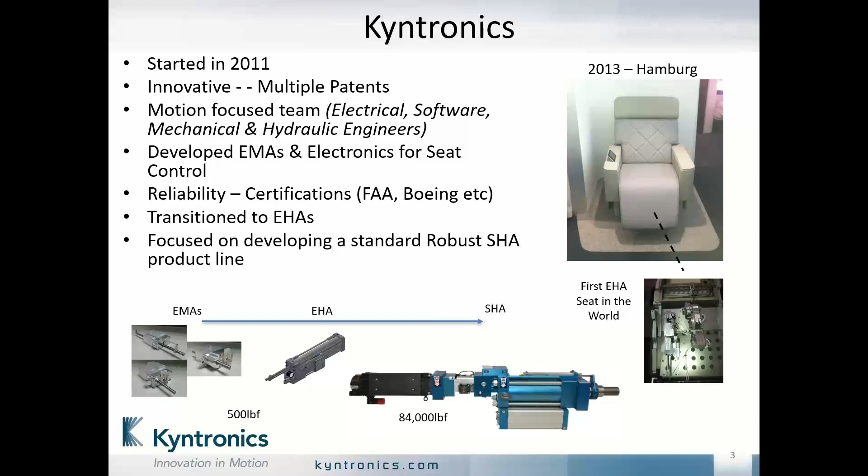So that's the genesis of it. That came from a product that we're not selling today that's going into seats.

During the development process, it was important for us to develop a modular solution. We have over 1 billion combinations. Our focus was to try to maintain standards, minimize our inventory, but have a large breadth of product offering out there—various motors, a couple of different manifolds and pumps, power units. We can provide a panel or enclosure for an all-in-one solution. Our standard is 1-inch to 6-inch cylinder, up to 84,000-pound force.

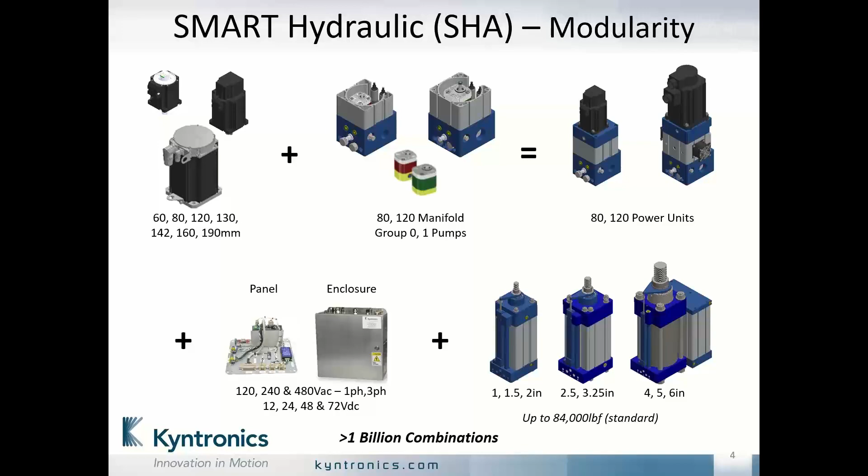So some of the repeated quote themes I wanted to share with you: this product is amazing. Usually we get that after we deliver the product—where's this product been, type thing. It's an amazing product to sell. It's unique, it's different, it's not a me-too product. The all-in-one is also a nice advantage. Those are some repeated themes, and we'll review some of these as we go through the slides.

So the basics of the EHA—this is obviously a repeat for some of you. It's pretty simple: you have a servo motor connected to a positive displacement reversible gear pump. You rotate the servo motor clockwise, for example, which pushes the fluid into the red, pushes the piston up, and extends the actuator, and vice versa counterclockwise. Blue retracts the actuator. The green is your reservoir for compensating for the rod volume. It's the most efficient actuator on the market—there's no metal-to-metal wear, it's an extremely efficient solution, up to 42 tons, and you can synchronize these together as needed if you need increased loads and increased speeds. No hoses, no threads, no leaks.

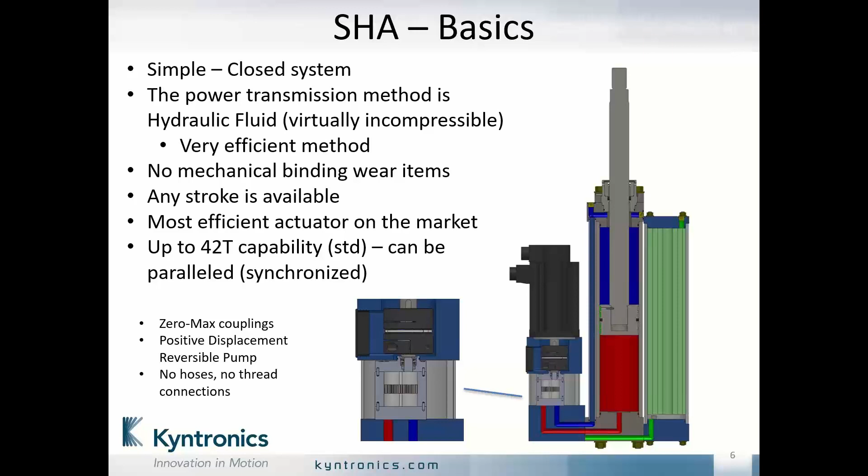The gear pump is surrounded by oil, so there should be no metal wear. Top and bottom, there are films of oil it rests on, oil squeezed together. The shafts have oil on them as a support bearing. So it's a total hydrostatic type sealing—no metal wear on the gear pump, or we have some issues.

Just showing you here is how we increase our speeds. So 0.7 gallons per minute is a small guy, up to 7.8 gallons per minute is a big guy, shown on this particular screen. This is basically your transmission. Of course, the bigger guy takes a bit more power, a bigger motor, but it's a very simple, easy solution to increase speeds. Each one of these can take your 3,000 psi, so your torque's there, and this just increases your flow by making your gears larger.

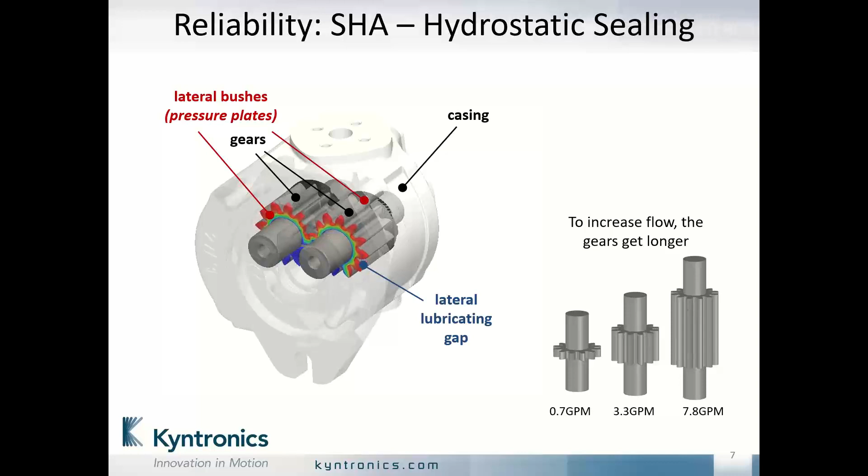Simple circuit. We provide optional cavity plug, check valves, or solenoids depending on your needs, for pressure sensors for force control, both in retract and extend positions.

4-quadrant control, and not much going on here. Relief valves on every single actuator, both extend and retract. This helps protect the actuator as well as the machine. A lot of our competition in this world can only do 2-quadrant control. We're doing 4-quadrant control.

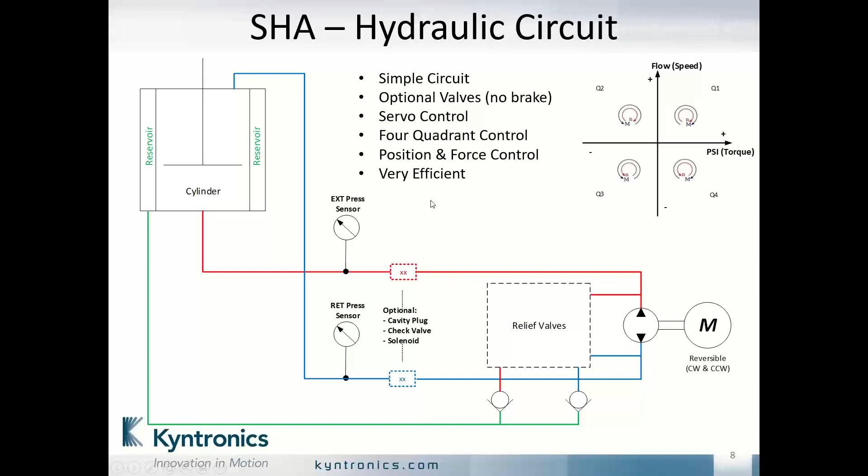The beauty of hydraulics is that it's just fluid. It can be moved in all kinds of different directions. These are some of our standard combinations we've shipped. This helps us integrate into all kinds of different machine orientations. Again, it's just moving fluid, and that's the beauty. We really don't have any issues figuring out a way to get our actuator to fit into a machine without doing any major redesigns.

Down below, just see various configurations. You can attach the enclosure electronics to the actuator if needed. For a DC solution, electronics and motor are all enclosed as an IP68 solution. Of course, we can provide an actuator by itself, customer supplied motor and drive, or something custom.

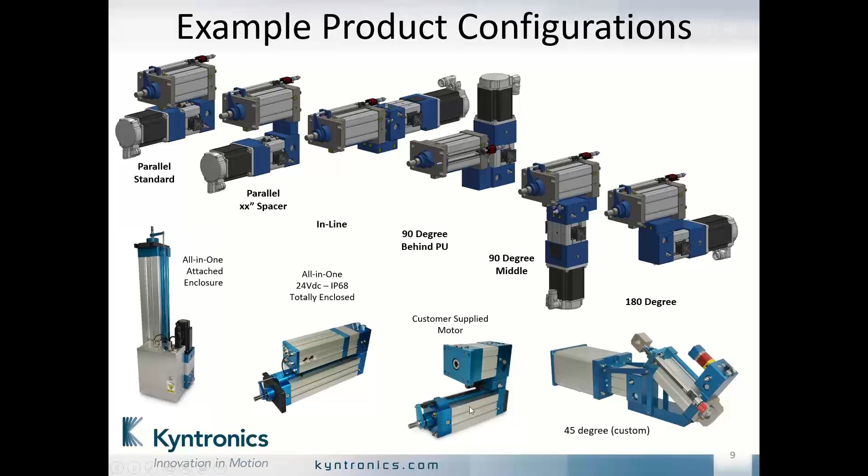Hey, Carl. Yes, I know I told you a moment ago you were coming through loud and clear. We've had a couple of comments that you're sounding a little muffled. If you're able to adjust your microphone position, that might help. We'll do that.

Mounting options, NFPA mounting options, standard mounting options. Nothing too surprising here. Just wanted to show you that all the standard mounting options, NFPA type things are available.

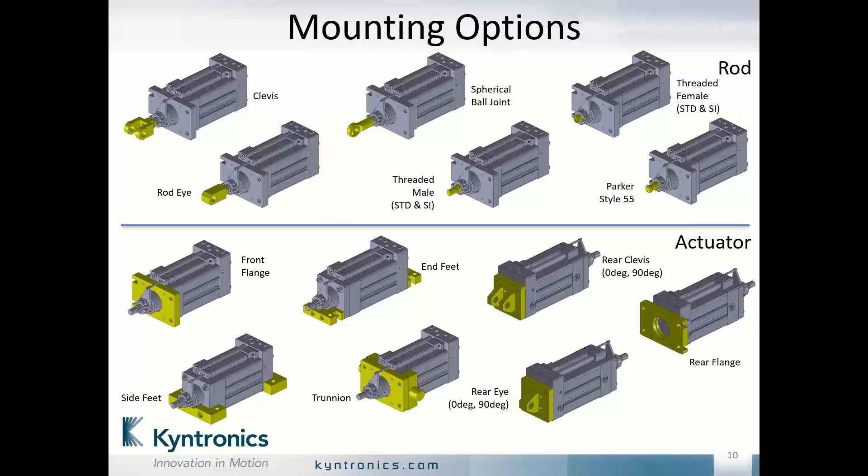Sometimes we get comments saying, hey, this particular customer says no hydraulics. With the Kyntronics actuator, there's hardly any fluid in there. It's minimal fluid. You can point them down the road regarding gearboxes - gearboxes in their plant have more fluid than our Kyntronics actuator. So just as a point, there's not a lot of fluid inside the Kyntronics actuator. It's very efficient. Closed system, no hoses, again, low amount of fluid.

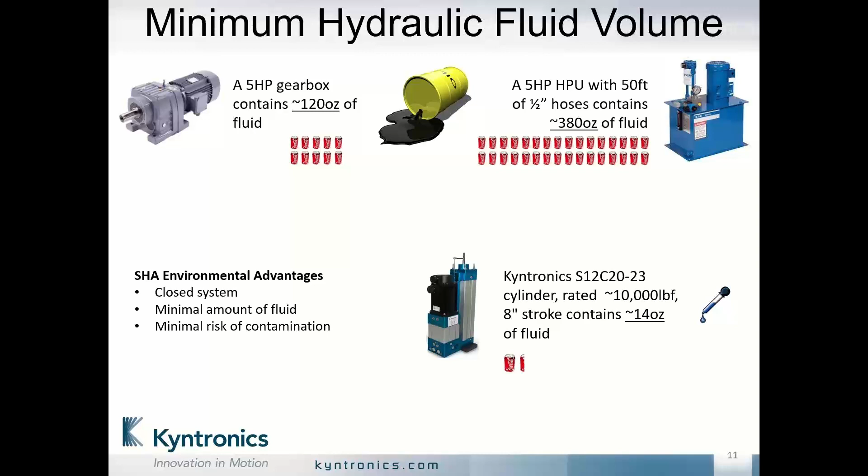So the all-in-one's important. Just wanted to point out that sometimes this is challenging. It's been challenging for our competitors. It's challenging out there for everybody. And our goal was, we're a solution-oriented company. We like to try to make the complex simple, and we're focused on that, trying to make the all-in-one a simple solution. So we have standard sizing, standard drawings, standard software. So our team, as well as our channel partners, are used to the software, setting up the actuators, setting up the wiring, the drawings, wiring up the actuators, etc.

So this is an important part of our offering. We like to try to take care of the customer however we can, and this is how we're doing it. And then, again, the apples to apples sell is somewhat challenging out there, to make sure that we're competing against a proper actuator only or somebody else, an integrator, providing the whole solution.

Some of our partners also provide the all-in-one, Rockwell, Siemens, etc. We have an AOI for Rockwell. They can also provide, and they also do provide the all-in-one.

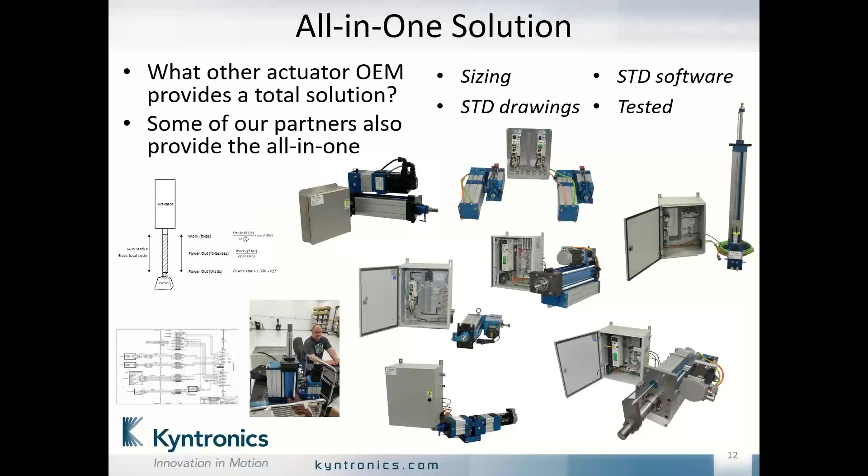So going over some of the lifting, getting in the lifting world, all-in-one again is that one-stop shopping. Hey, we want to be able to have this thing supported, etc. So we're doing that. Increased emphasis on going green, this ESG scorecard - that's the environmental, social governance thing that's getting more and more popular. That some companies have the scorecards, and it's important to some companies. So the environment, of course, is our part.

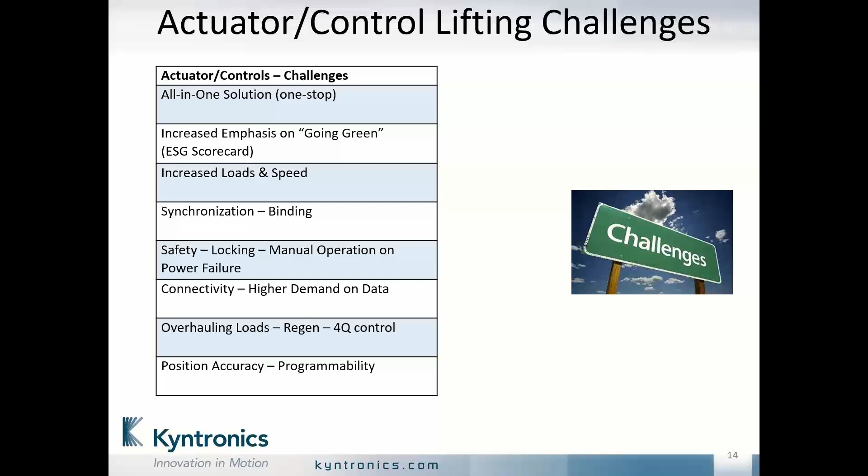Increased loads, lifting challenges, increased loads, synchronization, safety, manual operation. Some lifting applications require manual operation on power failure. Connectivity is also a challenge, IoT, etc. Overhauling loads, regen, four-quadrant control, and of course the position accuracy. These are all just some of the challenges regarding the lifting and somewhat in actuation.

So what's available to the actuation, to the lifting companies? Obviously, you have the hydraulics that are available. Proven technology has been around for decades. High force density, powerful, robust, can plow through most of the machine inefficiencies. There's no brake required. Shock or side loads are no problem, obviously, with hydraulics. And somewhat can be a cost-effective, simple solution for just moving back and forth.

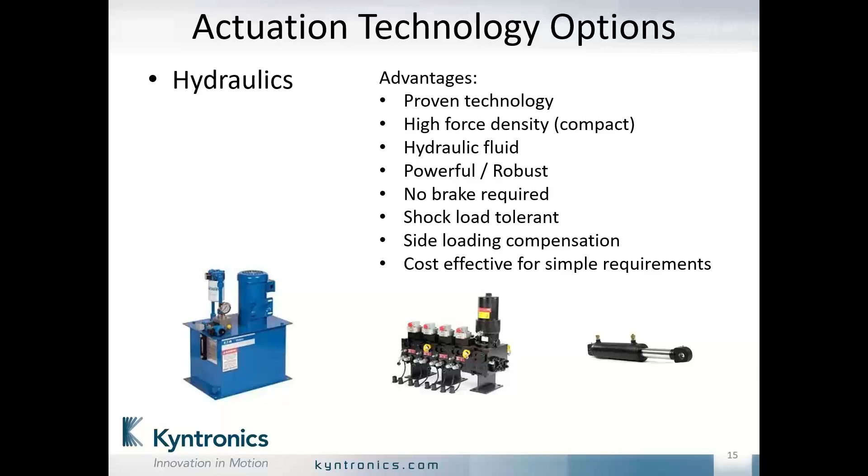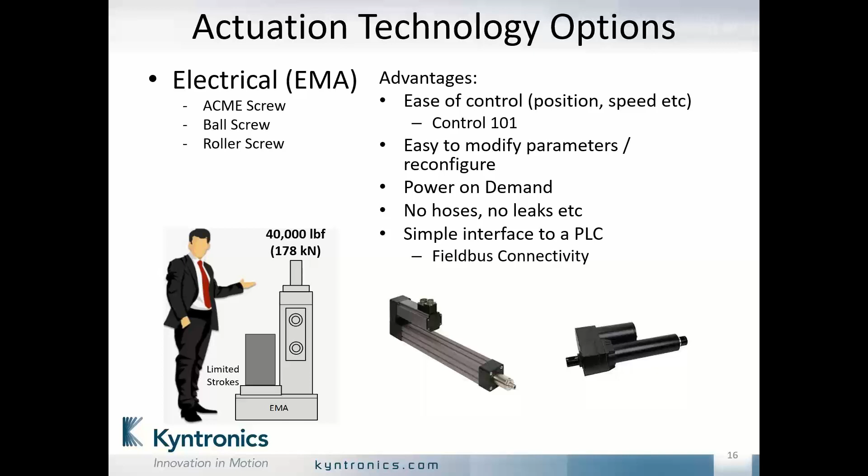Another technology is the EMA world, Acme ball, roller screws. That main advantage is the ease of control. Easily you can configure the parameters, and modify as needed. Power on demand, also a nice, important advantage of the EMA - it only runs when needed, opposed to the hydraulics, which needs to run continuously. Very inefficient. Of course, there's no hoses, no leaks. Simple interface to the PLC.

Some of the challenges regarding the EMA and hydraulics: metal wear, of course, we're all aware of that. Load dependent - as load increases, reliability decreases. Shock loading, side loading are all enemies of the EMA. Got to avoid that. Maintenance with the metal wear is always something that needs to be lubed up continuously, or that lubrication goes away. Ingress protection is also an issue - it's expensive in order to make sure nothing comes into the EMAs.

On the right-hand side, of course, it's the hydraulics world. Some of the challenges: environmental issues, leaks, continuous running motor, floor space - you can't program these things too easily. Maintenance, continued maintenance, and upgrading. The HPU is a fixed unit, fixed horsepower. If you want to add cylinders, you got to upgrade the HPU.

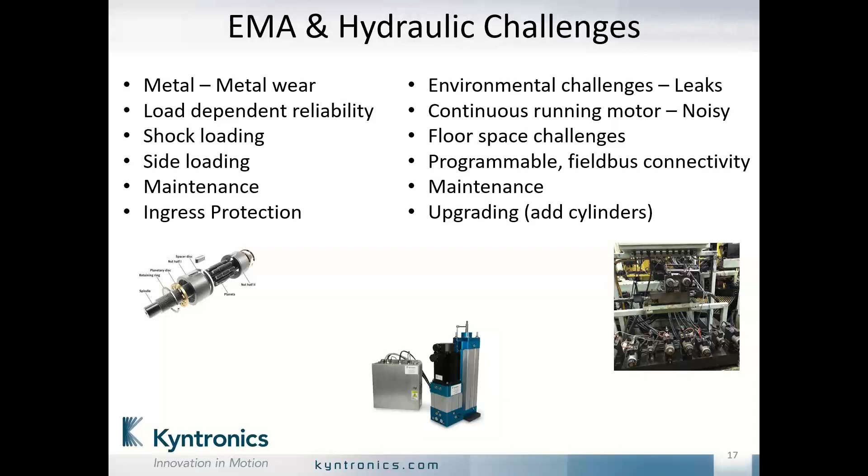So keeping those advantages and challenges in mind, the SHA truly combines the advantages. We're going to go through some of those and highlight those throughout this presentation. It does combine the advantages, takes advantage of the assets regarding the hydraulics as well as the mechanical, and it also solves a lot of the challenges. Best of both worlds.

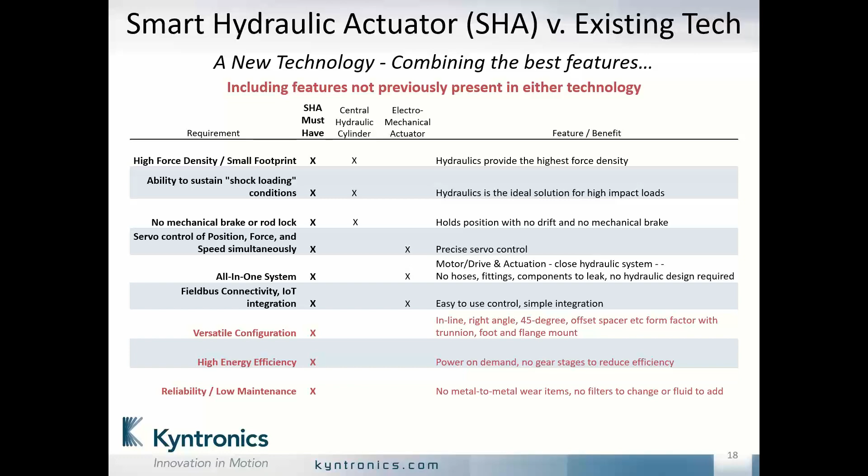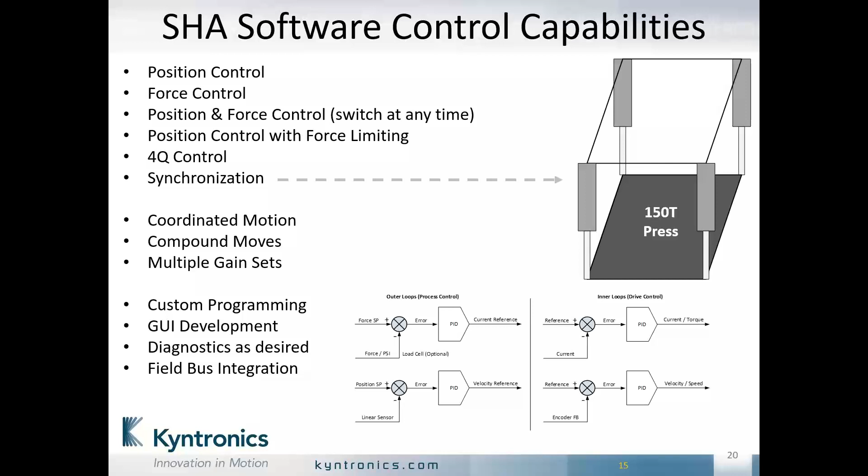Four-quadrant control, synchronization, as mentioned - you can increase the loads, increase the speeds by paralleling units up, coordinated motion, compound moves, and if needed, we can do custom programming for OEMs, etc. All this is included in the AOI for Rockwell.

So synchronization - some of the challenges regarding synchronization: lifting, of course, you've got to synchronize actuators together in a lot of cases. For hydraulics, it is very challenging, very expensive - all kinds of different fluid paths, flow controls to make sure the actuators are syncing together when you really need that, 5 thou or better type synchronization. It gets expensive. With EMAs, their advantage is they do the digital lock, which of course the SHA takes advantage of. That's what we do.

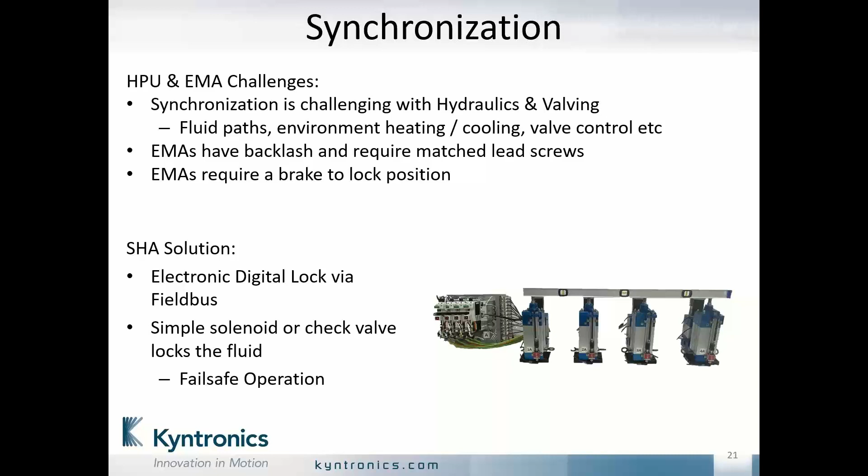The EMAs have backlash, require sometimes matched lead screws in order to properly and accurately sync. They also require a brake to lock position. Again, the SHA takes advantage of the technology that's out there for the EMAs - it uses that for digital lock and doesn't have a brake. You don't have backlash. So as soon as you stop, the fluid locks into position. This is an example of taking advantage of the hydraulics as well as the EMA technology while solving some problems.

Regeneration - regarding regenerating, overriding loads: where does that power go when you're trying to control? In hydraulics, we use a counterbalance - that creates a bunch of heat. You have a spring kind of adjusting the flow. It's challenging to control, and again it adds heat to the fluid, which is something we try to avoid.

With the EMAs, they use dump resistors, and that's what we're using. But some of the challenges regarding EMAs - it's difficult locking into a position. Obviously you use the brake. You have to stop, make sure you're at zero speed, and then you engage the brake. If not, you get premature wear. So that's something that we don't have to worry about.

As soon as you stop, the solenoid goes on or the check valve is engaged to ensure the actuator's locked in position. So again, we're taking advantage of some of the hydraulic locking features and taking advantage of the EMA features regarding the regen. We're taking advantage of both and solving problems with the SHA itself.

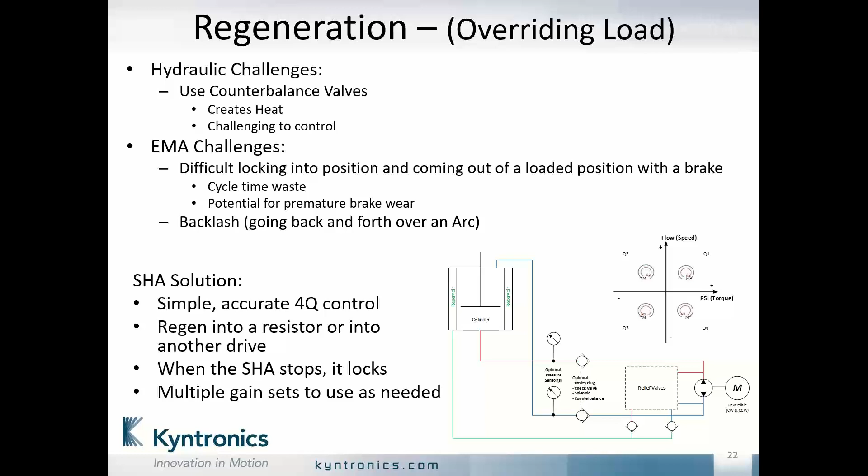As mentioned, the AOI we have developed with Rockwell - all the software features already mentioned, all the control features that we've already mentioned. So this is a nice solution for the Rockwell companies or the Rockwell customers that need the Rockwell solution. We are a technology partner - used to be called Encompass. We are a technology partner and are working with them to spread the word.

So some of the lifting examples, going into some of the details and challenges - we've got about 8 or 10 examples here. This particular example is regarding the security wedge lifts. They needed higher loads, increased speeds. Sometimes it's a tight fit into their wedges - we figure out a solution how to get in there. Liquid ingress, IP67 or better is important. Manual operation upon power failure - you need to be able to either lower or raise the lift as needed.

We solved all those IP67 requirements. Out of the gate, the actuator is an IP65 actuator. We add some better connectors, and we enclose the motor - as you can see here, the motor's enclosed. This is our power unit.

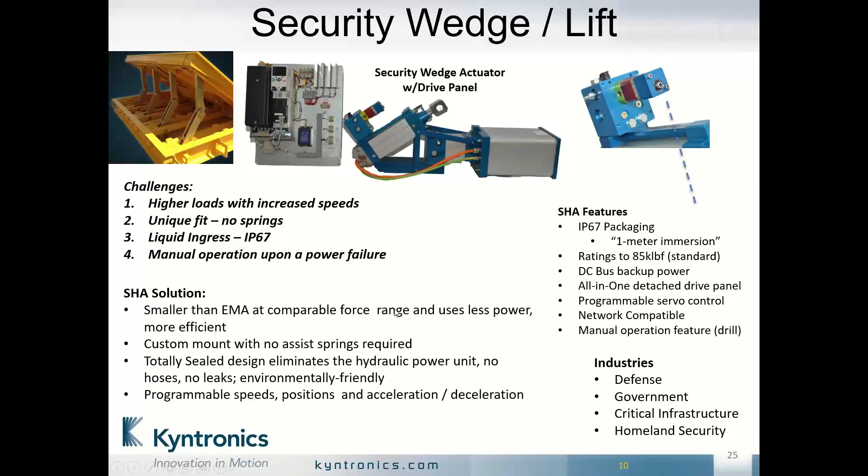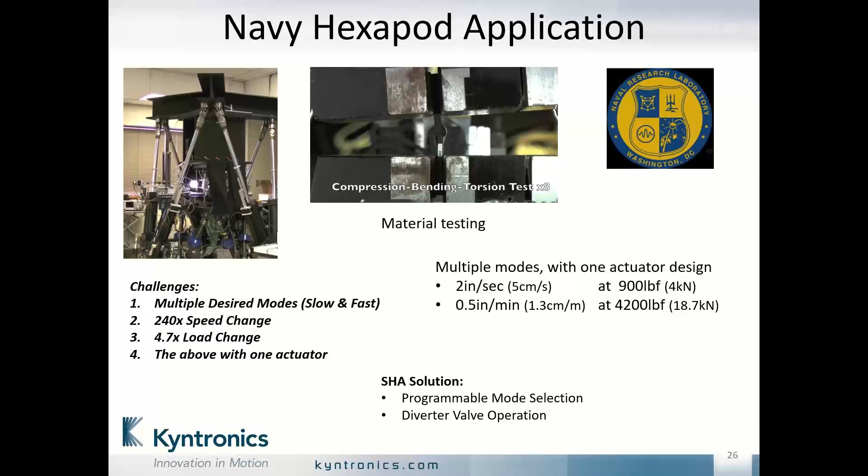So we just added a diverter valve that's actuated based on a solenoid. When they want to switch modes, they just turn on the solenoid, and that diverter moves fluid in two paths - one going into the reservoir, the other slowly trickling into the actuator - and they're accurately controlling that to do material testing. Again, the preferred solution was the Kyntronics SHA.

This particular example of lifting was lifting a large chip head positioner. The chip head is 8,000 pound force, needed to raise it up and down, over and over again. They had issues with hydraulics in the past, actually caused a fire in their facility, so they wanted to eliminate the hydraulics. They wanted the all-in-one solution. They're kind of out there in nowhere's land, so they wanted to be able to call and contact one company and have things solved - so that's what we provided, the all-in-one. Of course, no EMAs regarding the shock loads, so again we were the preferred solution for this particular application.

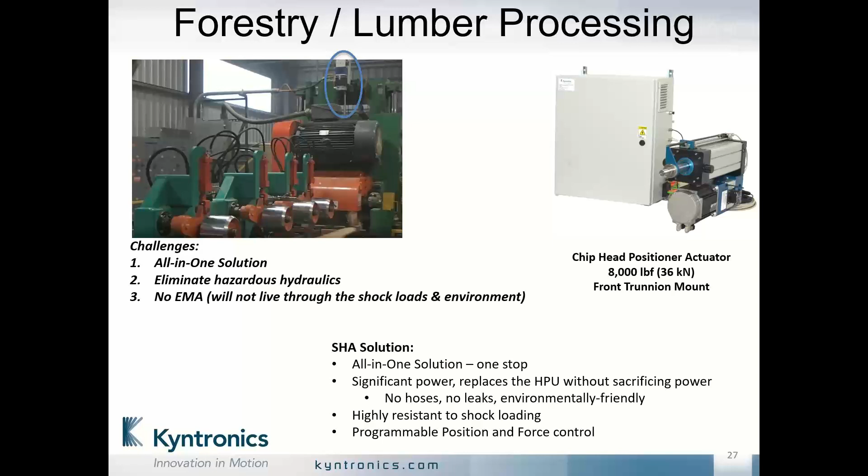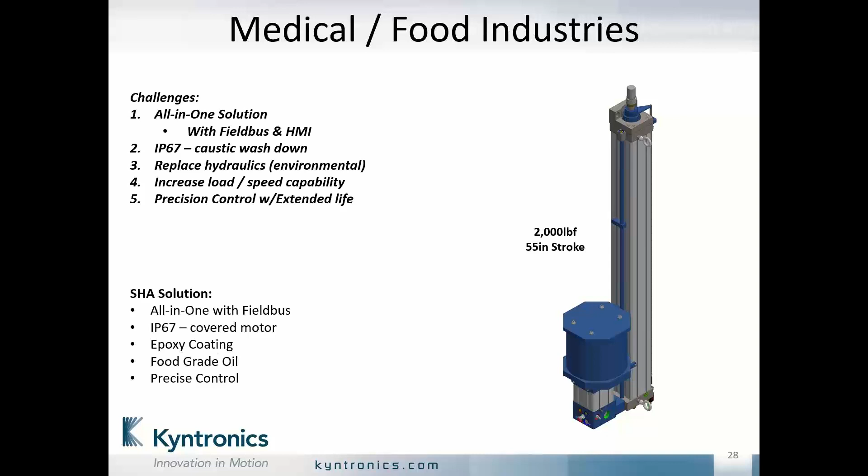This was a vat, as well as moving things into a smoker type environment. So they wanted increased load, speed capability, along with precision. We provided all that to this particular company - 55-inch stroke. This was a coordinated paint lift line.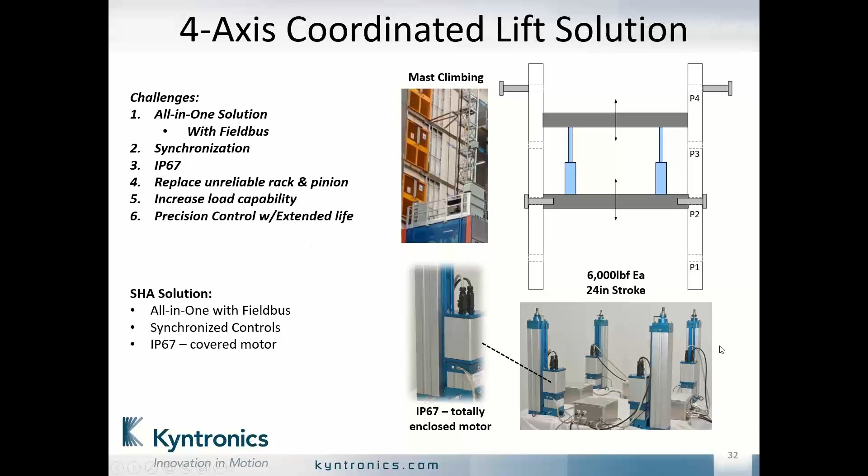With IP67 connectors, it replaced an unreliable rack and pinion system. They needed precision, with extended life being the more important feature, and the actuators needed to synchronize together to avoid binding as it's climbing up.

This was an interesting need from a particular military customer. Can't get into too many details, but they were looking for us to retrofit existing cylinders. They required high speed and high load capabilities.

Our standard off-the-shelf actuator didn't meet the high speeds and high loads they needed. Plus, they wanted to keep their existing cylinders, which are proven and used outdoors in a particular environment.

They had two solutions out there trying to solve this need: EMAs and hydraulics, and both were headaches for them. They originally had hydraulics, then went to EMAs.

The EMAs are failing, so now they're back to hydraulics, but they don't want to go back to the complex, messy hydraulic solution. So they wanted an all-in-one.

They let us know they had some issues with the EMA. The EMA integrator was buying actuators from one supplier, a motor from somebody else, and a drive from somebody else, putting it all together, and they were having issues with finger pointing between suppliers.

So we were able to provide them an all-in-one solution. They also wanted coordinated motion, and they had multiple cylinders. What you see below is our power unit.

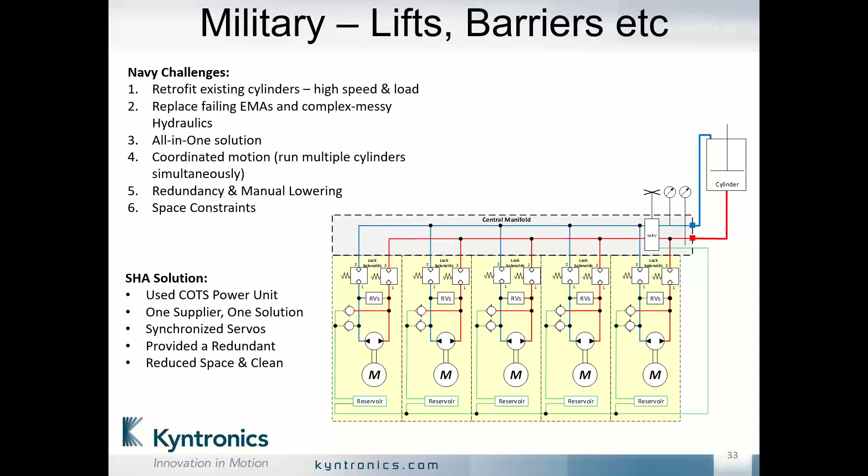This is our standard power unit, a commercial off-the-shelf power unit — one supplier, one solution. We were able to synchronize these cylinders together and meet all their needs.

So this is a bit of new news for our supply channels and customers out there. This is another product offering we're going to be offering soon: servo power units using our standard power unit.

This uses a reservoir and hose connectors. Yes, we usually say no hoses, but there's a big demand for this. It's not necessarily about replacing all existing cylinders — like the prior slide, customers sometimes want to keep the cylinders for environmental reasons, etc., and we can do this.

A lot of our competitors out there have something like this, and we already have it. There seems to be a need in the field, so we're going to offer this as a solution too — same drive and motor combination, and all the calculations we already have. We're looking to sell this as well.

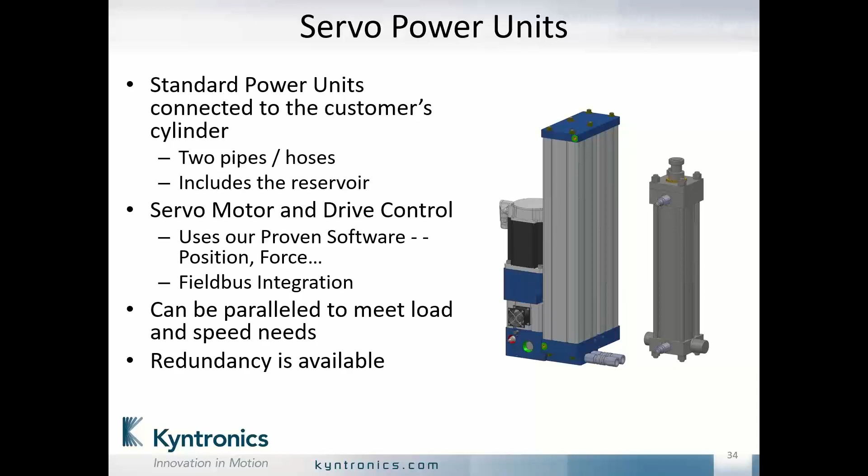As mentioned, we can parallel these units up to meet high loads and high speeds. Redundancy is another factor I forgot to mention — you can take these on and off as needed to keep redundancy available.

So wrapping up, the challenges are: going green, increased loads and speed, synchronization, safety, connectivity, overhauling loads, position accuracy. You can see EMAs — some EMAs can achieve some of those challenges.

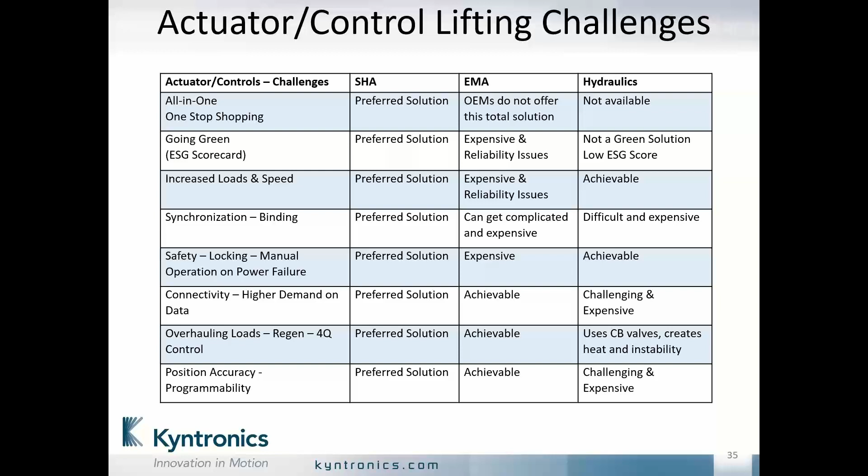Hydraulics can achieve some of those challenges. The SHA can achieve all of them. So the SHA is the preferred solution for these challenges, as well as your future actuation needs as required. All right, any questions?

Carl, we did have some questions on the chat window. Do you want me to read those for you? I can take a look here.

We had a question regarding using our force sensors for meeting safety requirements: does position control with force limit meet safety requirements? I'd say that although using pressure transducers for calculating force and controlling force is a tried and true technique, it's not intended for use as a safety limit or safety sensor.

It all depends on what you define as safety from my perspective. In some instances it could be sufficient, and in other instances you may need additional devices. I think we need to look at the specific requirements to properly answer that.

The drives we use have a safe torque off input that's usually wired into a customer safety circuit, and we'll gladly look at your safety circuit and make specific recommendations as to how you can achieve that.